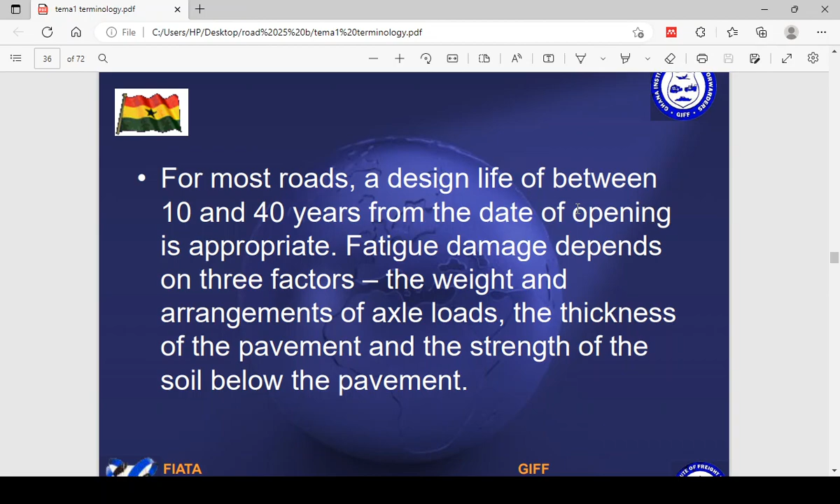Pavement damage increases rapidly with higher axle load, and actually increases faster than the load increases. Pavement fatigue is measured by the number and weight of axle loads needed to make the pavement unusable.

As each axle load is increased, the road can withstand fewer trips before it breaks up. So the more you load, the less the road can last. If axle loads are decreased, the pavement can carry more vehicles before they start failing.

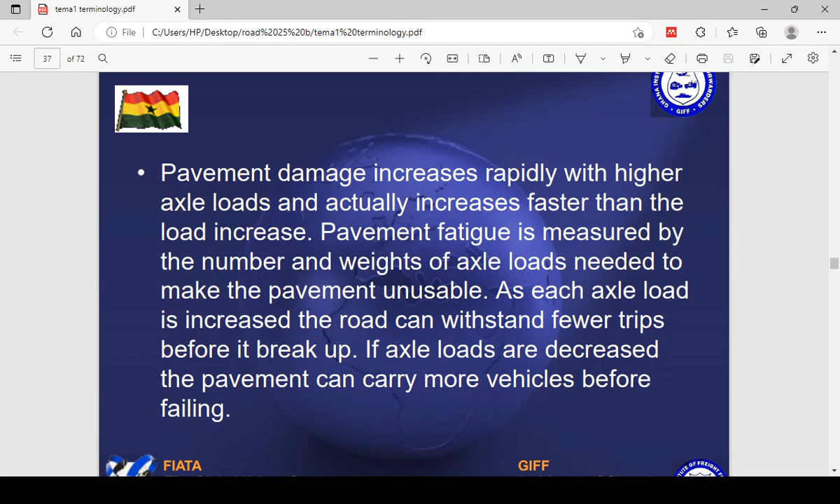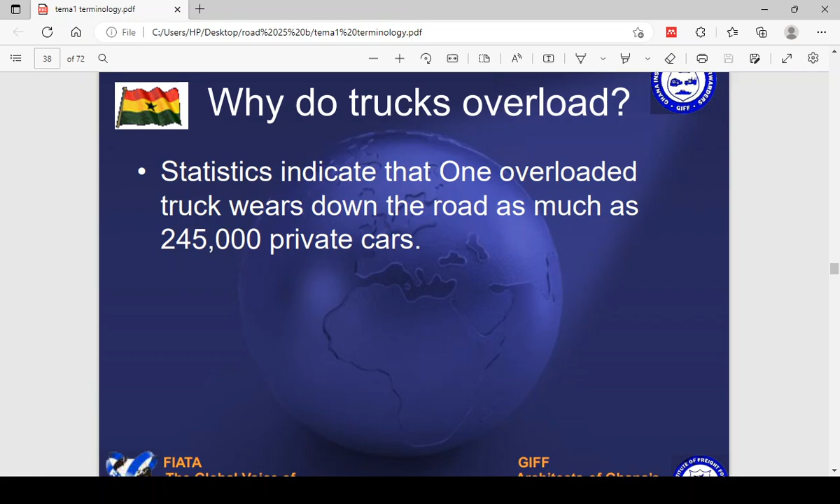Statistics indicate that one overloaded truck wears down the road as much as 245,000 private cars. So if you overload your truck's axle and everything, you will spoil the road in one movement as compared to when 245,000 private cars pass on it. You see the damage alone which you are causing.

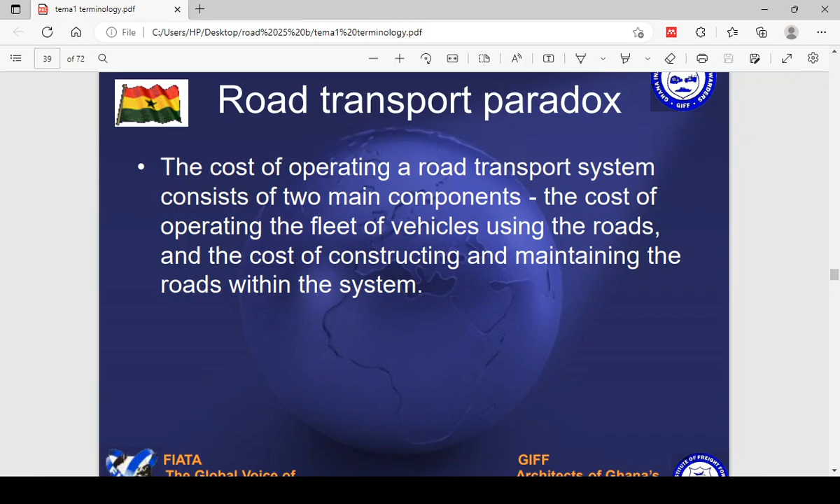The cost of operating a road transport system consists of two main components: the cost of operating the fleet of vehicles using the road, and the cost of constructing and maintaining the roads within the system. It is generally found that the cost of transporting a particular tonnage of freight decreases rapidly as the amount of freight each vehicle carries increases.

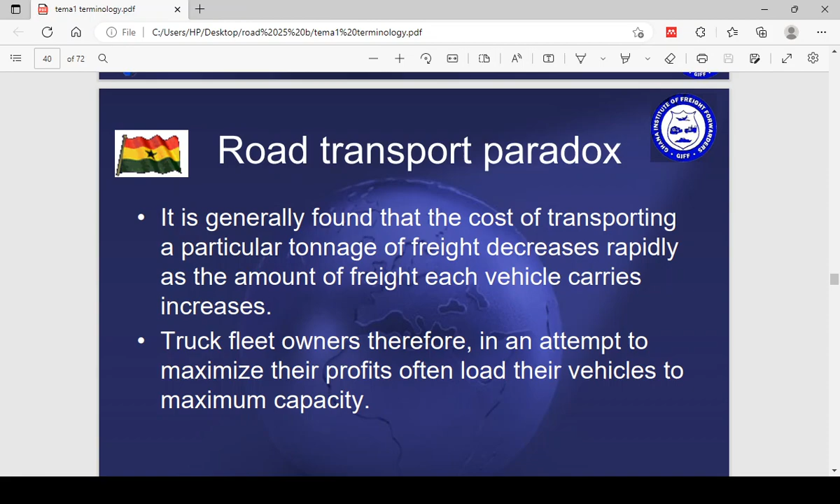Truck fleet owners, therefore, in an attempt to maximize their profit, often load their vehicles to the maximum. The more heavier you load your vehicle because of the profit you want to get as a freight forwarder or road transporter, the more you are destroying the roads. On the other hand, it has also been found that the cost of providing and maintaining the road increases as vehicle axle loads also increase.

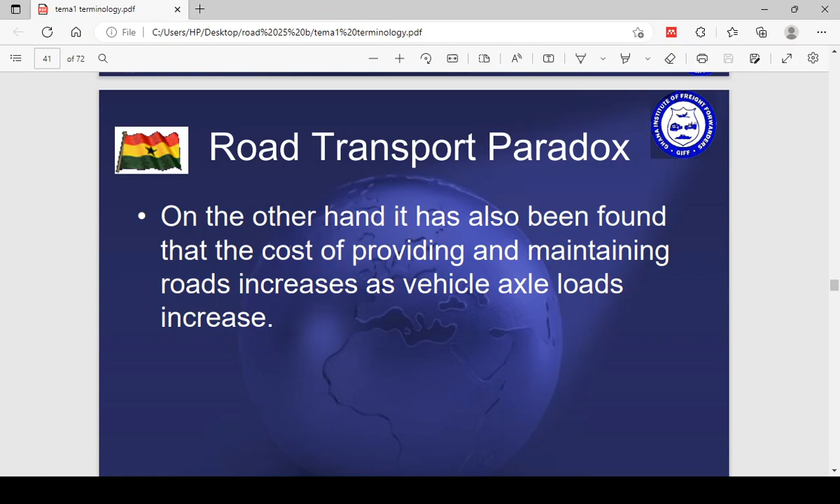This is governed by the general engineering principle that the degree of pavement damage caused by an axle load is proportional to approximately the fourth power of the axle load, thus implying that the heaviest 10% of axle loads can often cause more pavement damage than the rest of the traffic combined.

All that I'm saying is don't overload the trucks. Look at what the Burkinabés do - they go into the port and overload the trucks. When they are going, they pass under the bridge in Ashama and fall down. Sometimes when they even want to park and do some work, the weight of the vehicle will draw them down, and then the car will get an accident. The weight is very important.

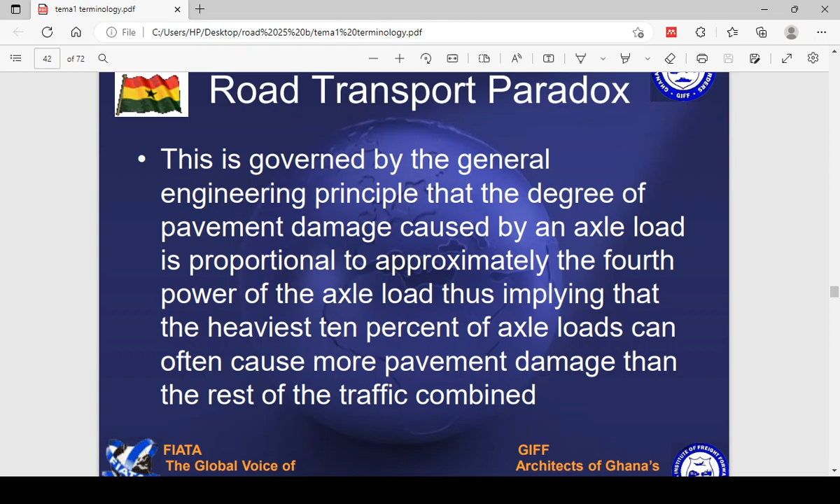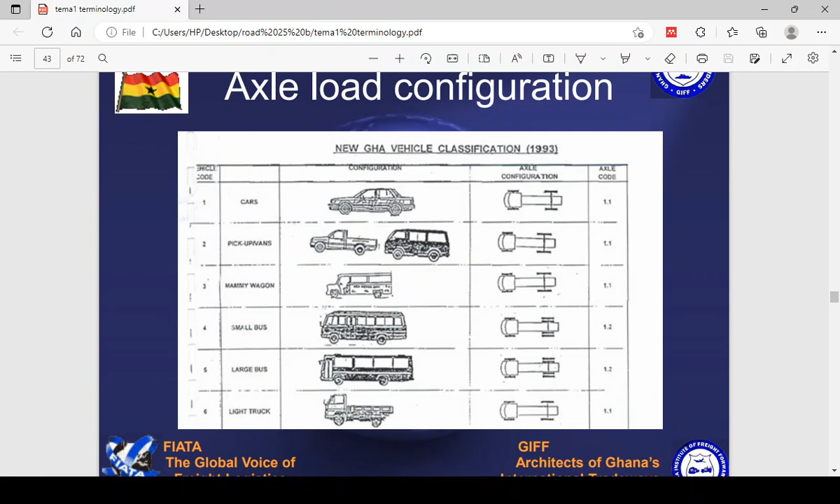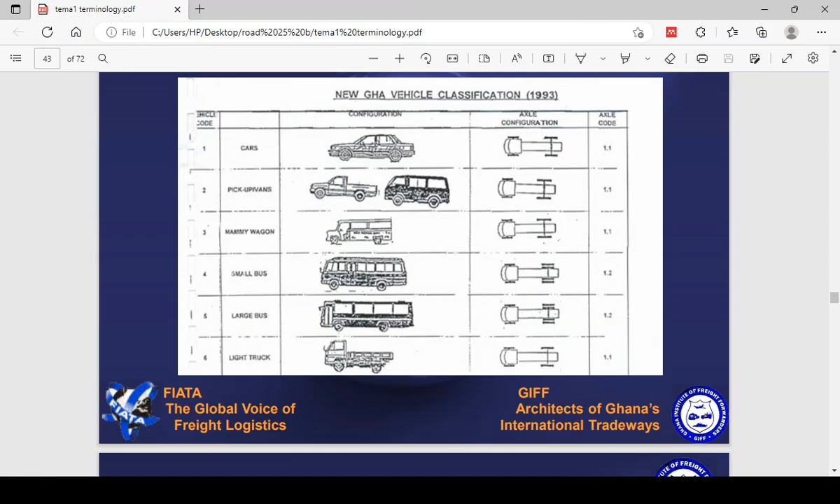Look at some of the trucks and their axles. The first one, a car - look at what the one axle is carrying. The second one, the third one - look at it closely, expand it, and you see the bars. The skeletal system is where you see the axle configuration, then the axle code is at the back, 1.1, then the configuration - that's the car, the pickup, the mammy wagon, the small bus, the large bus, the light trucks, medium truck, heavy truck, semi-trailer medium, semi-trailer heavy, extra. Look at their chassis.

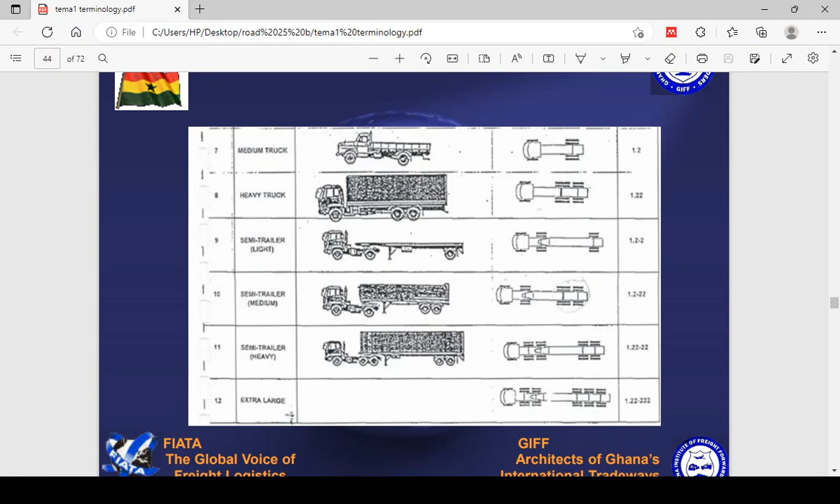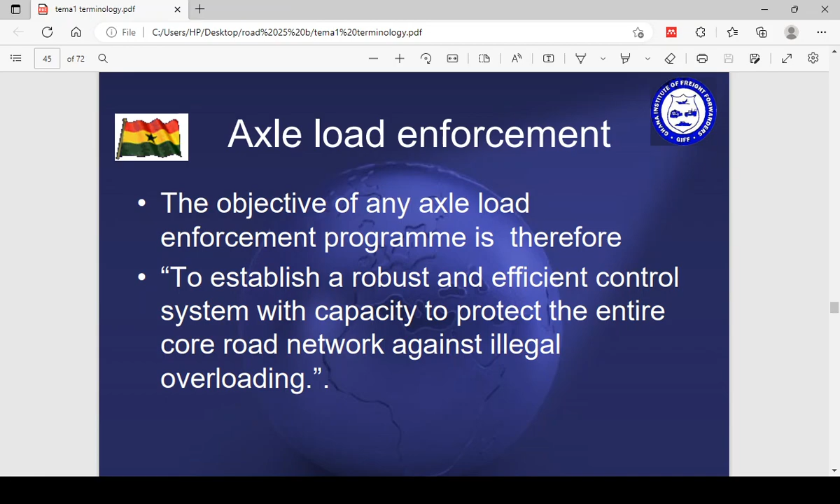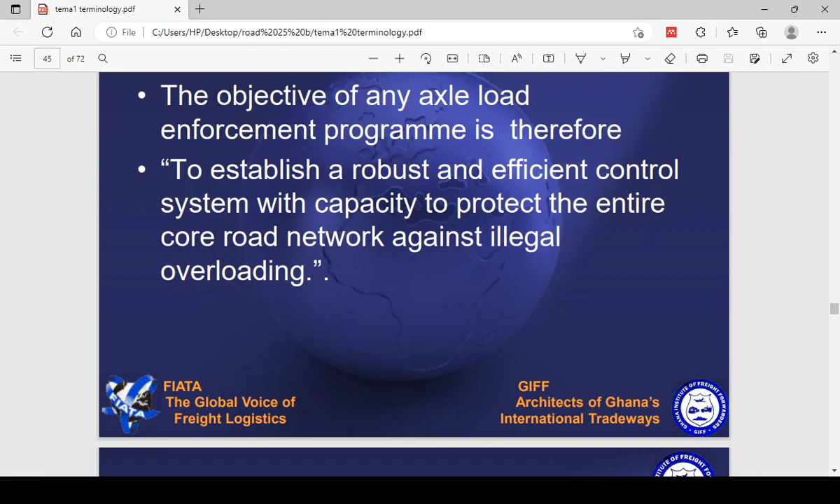Axle load enforcement - the objective of the axle load enforcement program is to establish a robust and efficient control system with capacity to protect the entire core road network against illegal overloading. You have seen them on the road when the cars are passing - they say they should pass and go, they will weigh them. The objective is to make sure that they don't overload, so that the roads are maintained.

In general, axle load should be enforced when the cost of repairs of the road is more than the cost of additional resources required to lift the excess capacity on the system.

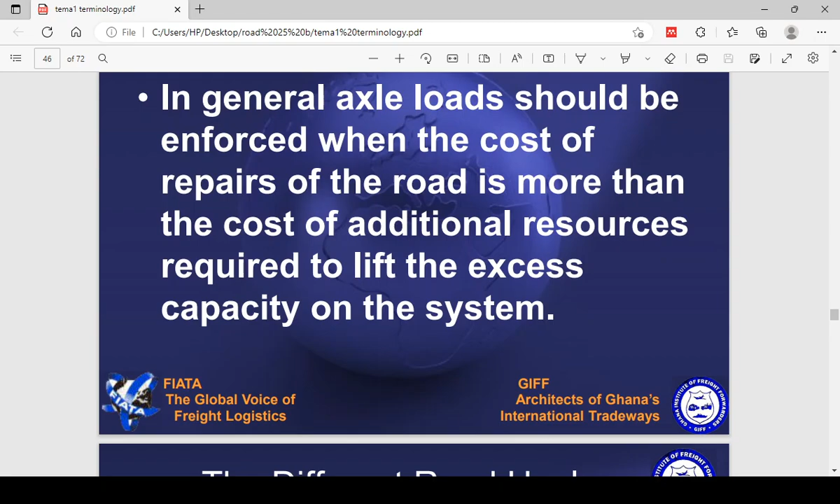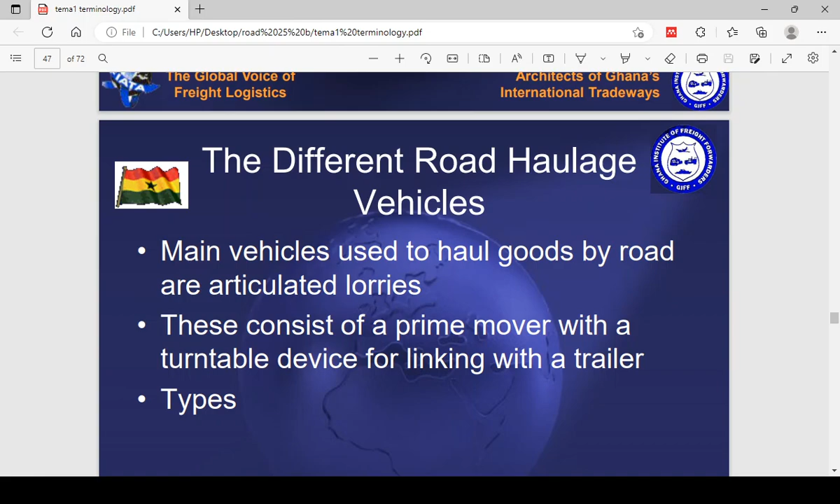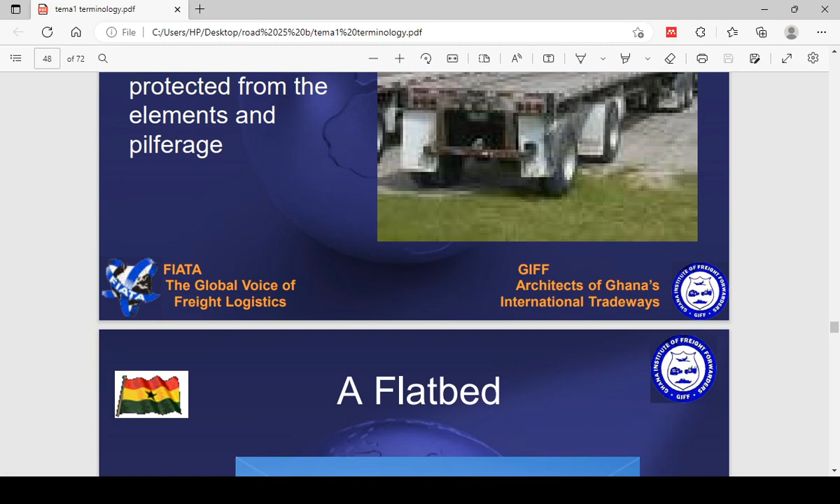Main vehicles used to haul goods by road are articulated lorries. This consists of a prime mover with a turntable device for linking with a trailer. Other types were used for almost any kind of cargo, but goods need not be protected from the elements and pilferage - so it's flatbed. You see the picture there. Then this one is also a flatbed but loaded with pipes.

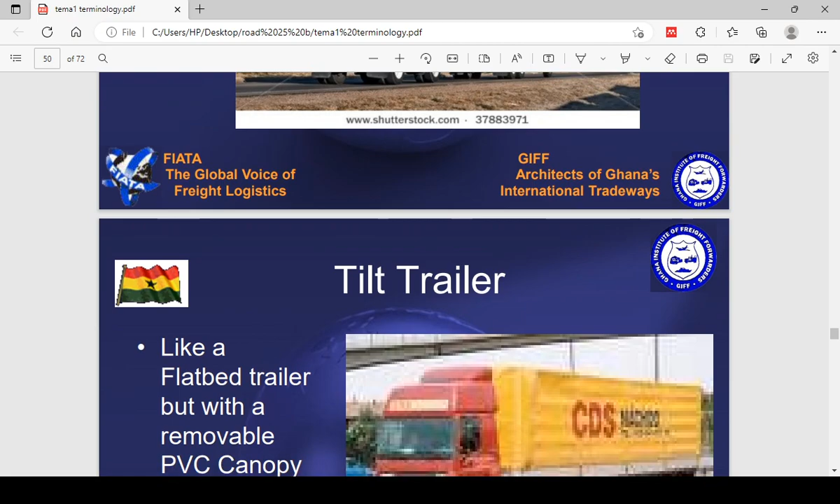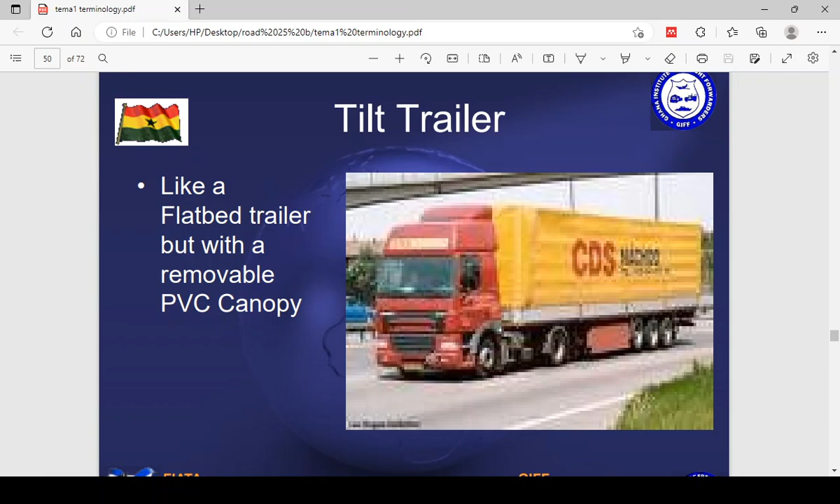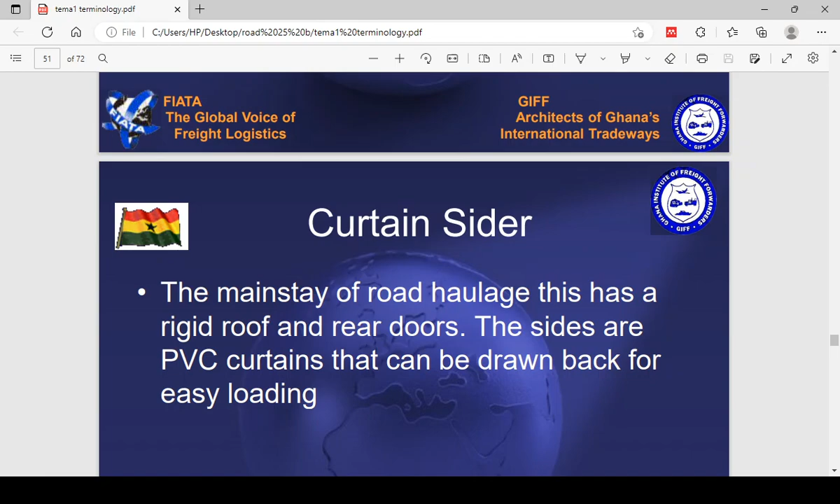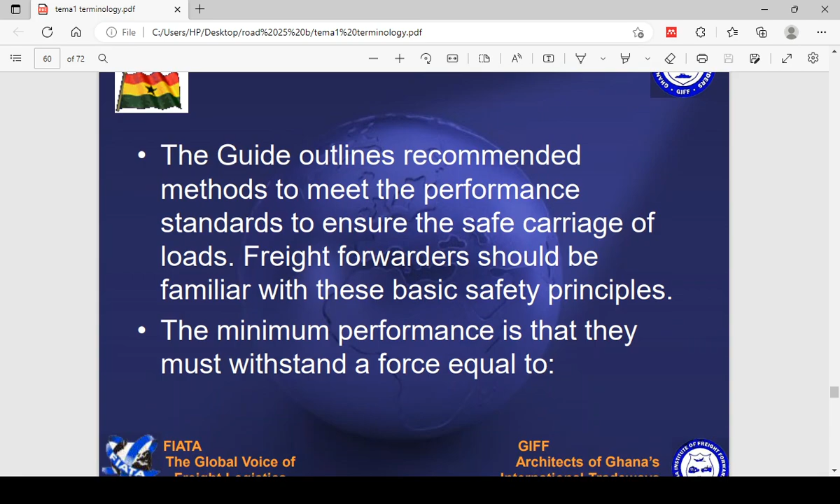Safety operating guidelines for freight forwarders using trucks - what are the safety guidelines? These guidelines are designed to support the consistent implementation of safety models to ensure safe working practice when operating with trucks. The guidelines outline recommended methods to meet the performance standards to ensure safe carriage of loads. Freight forwarders should be familiar with these basic safety principles.

The minimum performance is that they must withstand a force...